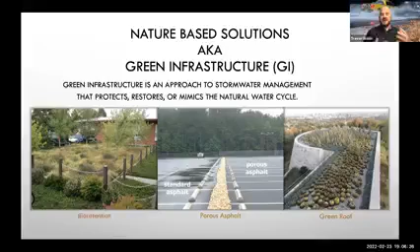Green infrastructure is an approach to stormwater management that protects, restores, or mimics the natural water cycle. That's it, that's real easy. If you keep that definition in your head and approach your design projects with that simple definition, you're already leaps and bounds away from many urban planners and designers in the field when they tackle these things.

So how does green infrastructure work? Again, it is mimicking the natural hydrologic system. In nature, when it rains, what happens? We're talking about infiltration, filtration, water storage, evaporation, and transpiration. Those are the goals, again just mimicking the natural hydrologic cycle. This is what we're trying to focus on.

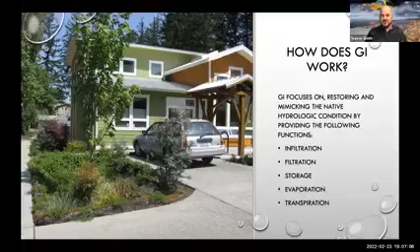When you're going into these designs and thinking about green infrastructure, you're really just thinking about nature. It's a system, it's a working system. That's what we're going to get into just a little bit here.

The 5 core methods that I teach in most of my design classes for green infrastructure are rain harvesting systems, permeable pavements, bioretention and rain gardens — what you're looking at here is an urban bioretention system — green roofs, and tree plantings. These are the 5 core systems that I focus on. There's not enough time to get all into this, but these are the areas we can be thinking about.

So how does green infrastructure work, and why is it really good for us? How does it help our environment and help save the planet, we'll say. 95% of the Earth's heating and cooling is controlled by the hydrologic cycle. There's a huge focus on carbon capture and fossil fuel elimination and everything else. Though that is all very good, that is all part of climate change, that is all things that we need to do.

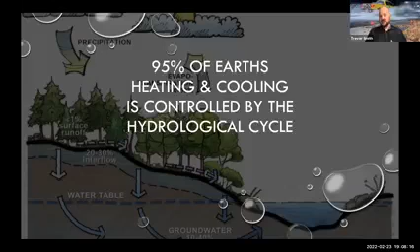This is a very important piece to remember, because if we can focus on this, we can actually have our green spaces have quite an impact on climate change in general. 25% of solar radiation is transferred back through transpiration. This is a huge proponent for green spaces, because the more green spaces we have, the more trees we have, the more transpiration we have. That is going to help cool our area. It's going to create microclimates. And as those microclimates connect on a larger scale, we can actually affect climate change and global warming.

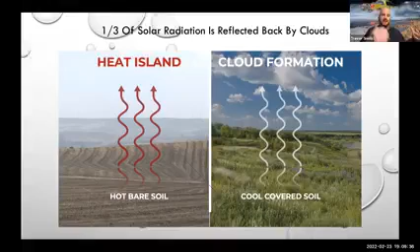One third of solar radiation is reflected back through clouds. This goes back to evapotranspiration. When we have paved surfaces, bare soil, farmland, and construction sites, all of these are collecting heat and radiating it back into the atmosphere. We know about the heat island effect - this happens in our cities, and it also happens in our farmland. So if we have more green space and look to nature-based solutions, we get evapotranspiration, which aids in cloud formation, which reflects solar radiation, mitigating the heat island effect.

So we have all this now toxic water, because that is water's job - water is here to dissolve things. In the soil, it helps make nutrients soluble for our plants. But when it runs across our built surfaces, it picks up things like hydrocarbons and microplastics. They're now talking about acceptable levels of microplastics - to me that's like saying there's an acceptable level of rodent feces in my food. No, there isn't. There's no acceptable level of rodent feces, and I don't think there's an acceptable level of microplastics in my body. So this is where green infrastructure comes in.

Now, often when we're talking about green infrastructure, we're looking at it as a system. And I get a lot of pushback from municipalities because they're like, well, what are we going to do with our existing stormwater systems and everything? That's very short-sighted thinking. We need to marry green and gray.

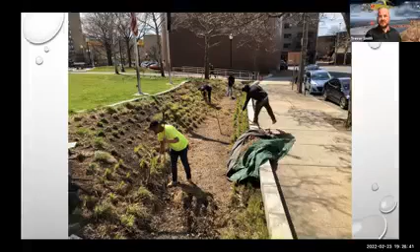Just another example in Boston. This is one of the other ones we took care of. This one was already constructed, and this was very much a maintenance program. But we learned what plants are supposed to be there, what aren't, how to keep this open, how this functions, etc. And then we came in at the end.

So we learned the entire cycle of seasonal maintenance. You saw from spring, getting it ready, getting the trash out, getting everything cut back, to fall, cutting things back, and making sure the excess debris is out of there, and that the inlets and outlets aren't going to be clogged over the course of the winter, and it will still be able to function.

One of the biggest things I advocate for are trees, because trees absorb 25% of atmospheric carbon. Trees stop that rainfall, slow it down, and gently set the rain to the ground. When they catch that 20-mile-an-hour drop and gently set it to the ground, they steal the velocity and frequency of how quick the rain is hitting the ground, increasing infiltration over time, which is exactly what we need, because the more infiltration we have, the more transpiration we have, since we have all that water in the soil.

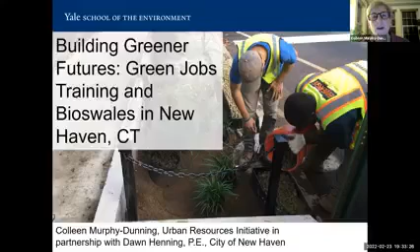I'm going to talk specifically about how we've been doing workforce development in New Haven, Connecticut, building bioswales, a type of green infrastructure. Here's an outline: the environmental and social context of our city, why we're taking this approach, our partners, how we went from a pilot to scaling up to a big project, and program outcomes. In this initial slide, you see a bioswale, with a cutout showing water coming in during a rain event.

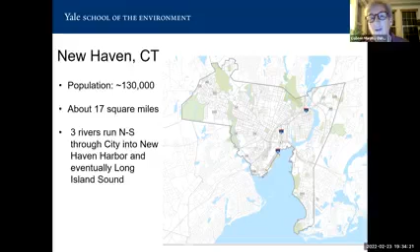A little background about our city here in Connecticut: it's a relatively small to average sized US city, population 130,000. We have 3 rivers running north to south that empty into Long Island Sound. So a lot of the pollution concerns Trevor outlined are concerns for our city, since we don't want to be part of the problem of polluting Long Island Sound and the ocean.

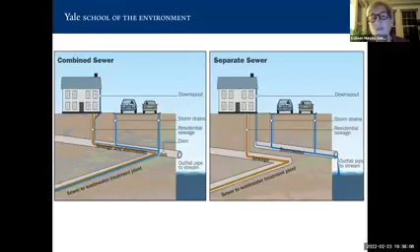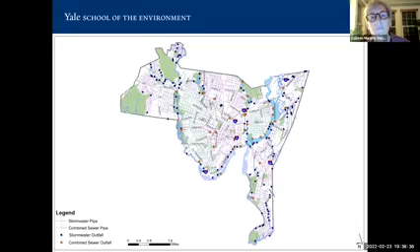My program, partnering with the city, is really—like Trevor's—about workforce development: how do we install bioswales, who installs them, and how can we bring more benefit, not just to the environment but to underserved communities and society in general? So I want to focus now on the social side: what's our city like, and what challenges do we face?

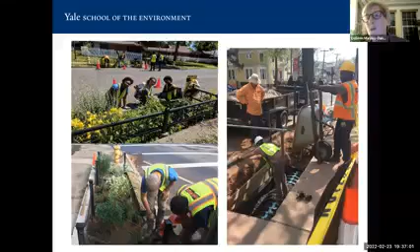So we have neighborhoods, and this is common throughout our entire country, where we have segregated poor neighborhoods and wealthier neighborhoods. So how do we address this problem where we have people living in poverty who need employment?

Relatedly, another problem we have all across our country and in New Haven is incarceration. In our average sized American city, we have 1,200 people return from prison every year in New Haven, and about half of them end up within 5 years going back to prison.

That is in large part because once you have a felony arrest or conviction, it's very difficult to get a job. And so that repeats this cycle of poverty, with kids growing up in poverty because maybe one of their parents is in prison, or other related problems like homelessness and so forth. So how do we try to break that cycle as well?

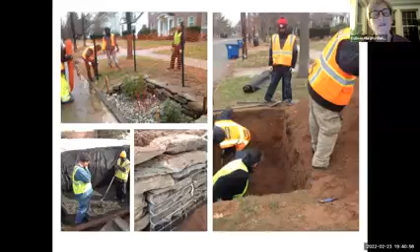So we wrote a grant to the National Fish and Wildlife Foundation to build 8 in a specific neighborhood where there was a problem of a combined sewer outfall dumping water into the West River. You can see these are images of our team doing the construction. It's all hand dug, by people who had never built them before, learning how to do it, just like Trevor described.

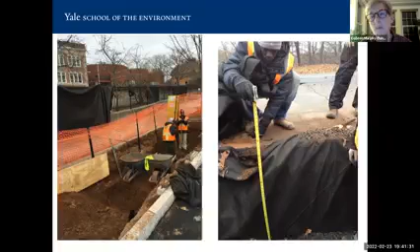Here's one we built in front of a school, where basically you're digging by hand a large chamber, and before we backfill it, you can see on the right measuring and putting in a geotextile. Here's a different project, same funder and grant, to continue exploring and learning the best methods for this kind of construction.

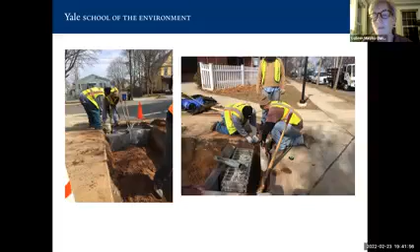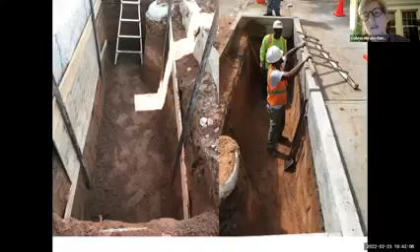Here they're putting in what's known as a gabion, like a chamber for an overflow event where water can pass quickly through that caged system. Here you can see we started building them next downtown, where the city engineer identified this as a place where we could really reduce the problem where the whole system gets overloaded, causing a big problem of stormwater overflows.

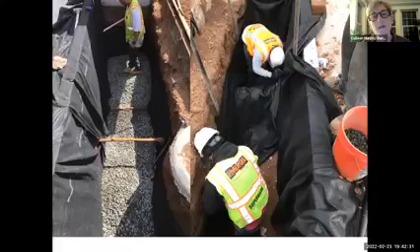So here we're building, you can see you have to put in some supports there before you're backfilling. They're 5 feet deep, 5 feet wide, and 15 feet long. And here's the backfilling with the gravel and the geotextile and putting in the gabion.

And then ultimately, this is what they look like at the surface. They look to neighbors, residents, or businesses like an attractive amenity. As Trevor pointed out, they have to be maintained.

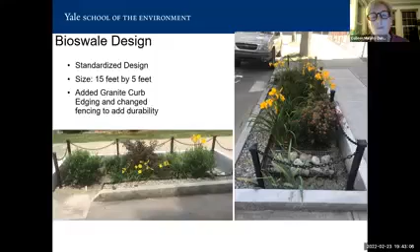But we've adapted the design over time. We've added, as you can see on the slide here, some granite curbing and edging. We changed the fencing to be more durable. And we have monitored these to test their efficacy, and they take much more volume of water than the city even anticipated. Here's just another example.

We also offered to do rain barrel workshops, and residents could get a free rain barrel for their homes, and the high school students helped with that program. As Trevor pointed out, you've got to use signage. It's a passive way to provide easy education for people to learn about what these systems are doing.

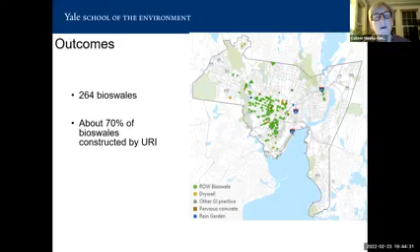So I'm going to stop there. And I think we still have a little bit of time for questions.